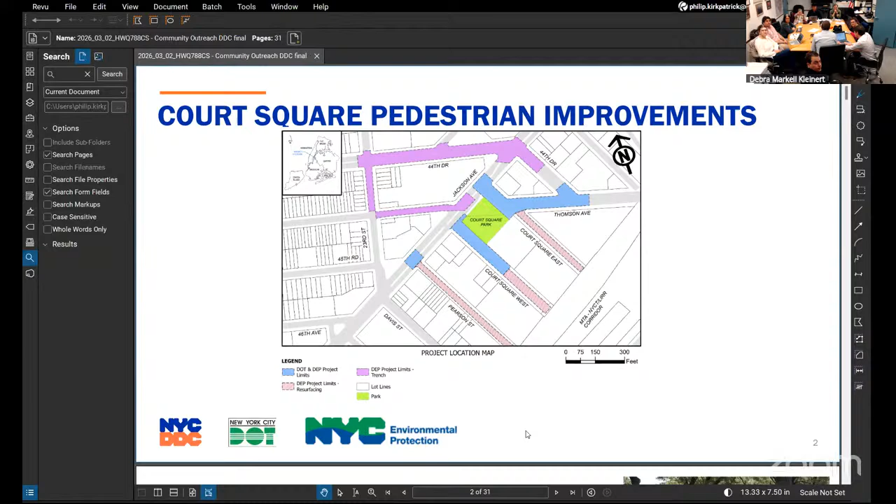So it's around the courthouse, a large part of it, and then what's opposite on the other side of the street, any structures? Familiar with MoMA? It's further down to the south, and then the pink areas around the city clock tower, formerly known as the Altice mobile buildings, and around that kind of property is where the water and sewer work is.

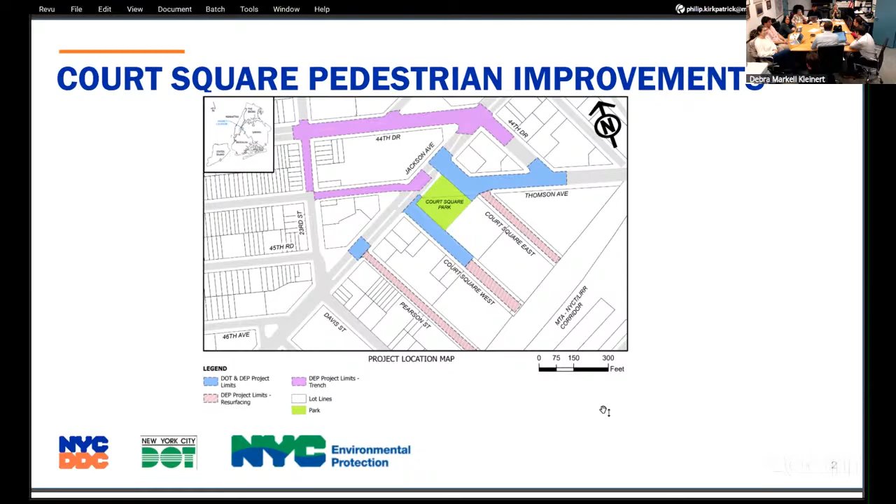Okay, we'll scroll. Here we go. Seems to work. That's good.

Just a little background on the origin of this project.

Following the original Long Island City rezoning in 2001, the neighborhood went through a big change with an increase of both jobs and residences. But the infrastructure has remained post-industrial, with very wide roads, not very hospitable for people walking and getting around the neighborhood. So we really want to make upgrades that meet both the existing demand of residential and community-oriented trips, as well as the upcoming density that is part of the One LIC rezone also passed. There's a lot of change happening in the neighborhood, and we want to make sure the infrastructure matches that change. DOT began exploring public realm improvements in the Court Square area to address these needs.

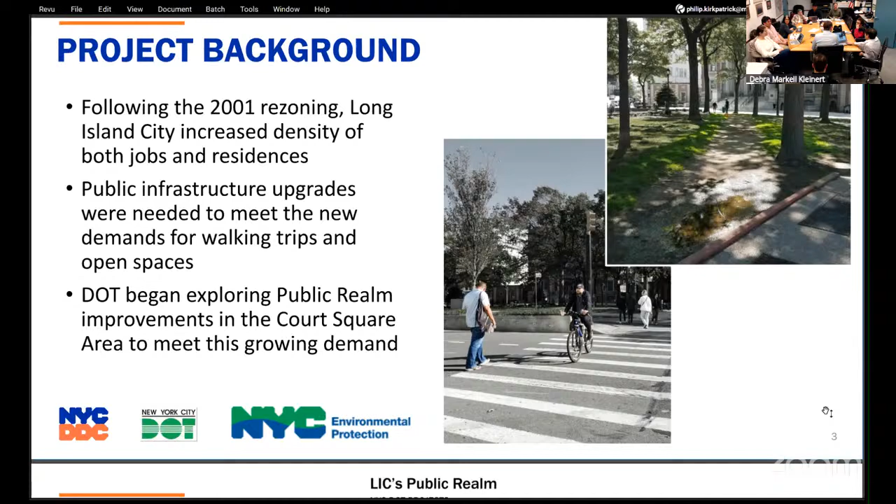For context, there's a lot happening in this neighborhood, both for DOT projects as well as the larger rezoning. There are past projects that improved the public realm on Jackson Avenue and Crescent Street, with shared street and pedestrian improvements. There's the recently installed 29th Street Plaza near the LaGuardia Community College, the 12th Street Plaza more towards the west in the neighborhood, and some upcoming planned projects on Thomson Avenue to increase bike connectivity.

There are also some additional capital projects upcoming. We are looking to build out the MoMA PS1 Plaza at 46th Avenue, which was recently funded as part of the Long Island City Downtown Revitalization Initiative, funded through the New York State Department of State. This project at Court Square, and a potential future project on Thomson Avenue near the project. So a lot is happening, and we want to make sure we're all coordinated.

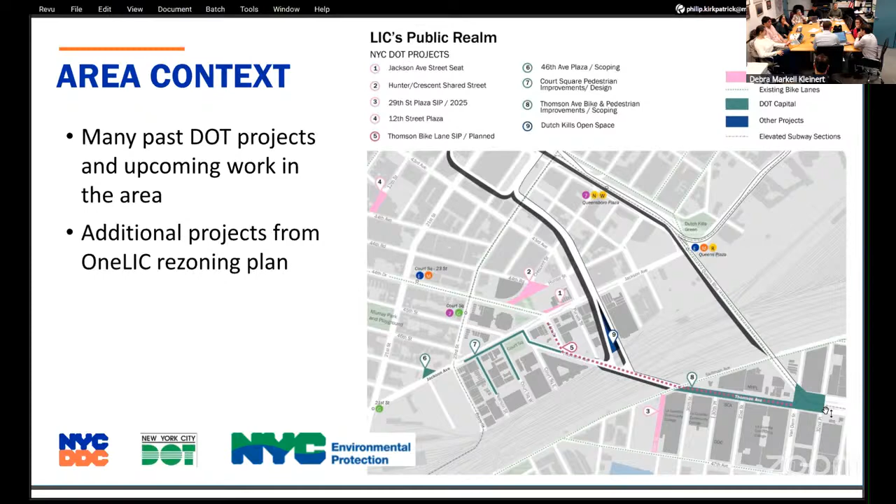For reference, for this project we began outreach in 2019, just before the pandemic, and had to do a bit of a shift as everyone did. We did merchant outreach and on-street outreach in October of 2019, followed by a virtual stakeholder meeting in November of 2020. We pivoted to a more virtual environment, culminating in final workshops in February of 2021. So we've done quite a bit of community outreach and engagement with both property owners, people on the street, and people in neighborhoods through virtual meetings.

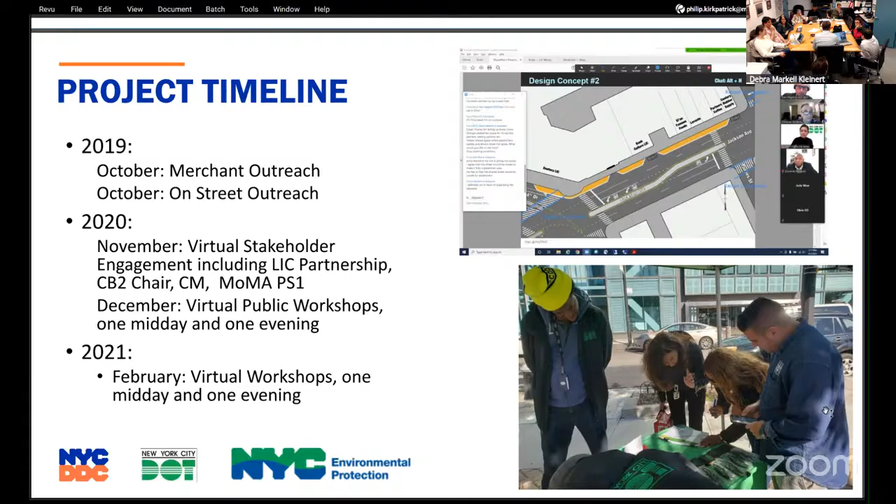Some general outcomes of that outreach: the most requested improvement for the Court Square area is increased pedestrian circulation space. There's a lot of roadway space, not a lot of sidewalk space. One activity we did for this outreach was have people trace their paths, and we saw where people are walking, shown on the map on the right. A lot of people come from the train over the bridge into the neighborhood, and people go up and down Court Square West to access the courthouse and businesses, while also accessing larger areas.

Some of the main concerns that we heard from the community were a high rate of vehicles failing to yield, high vehicular traffic volumes, and speeding vehicles.

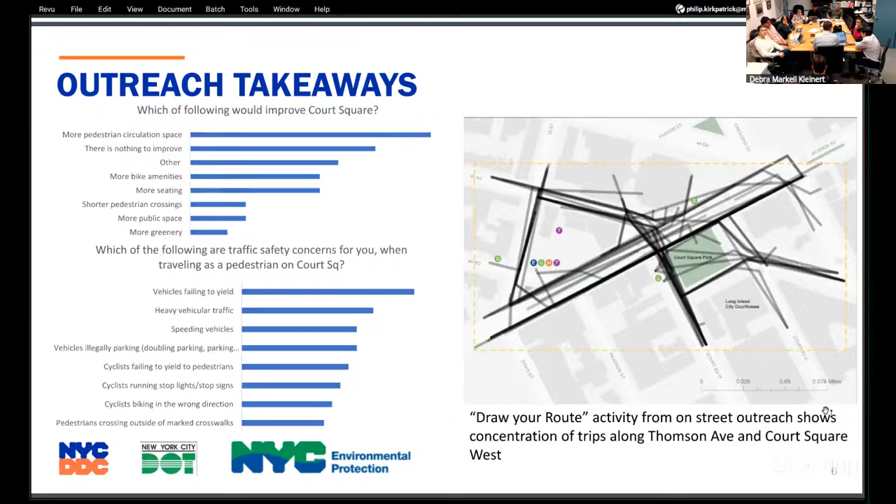The major moves for the street reconstruction project look to increase the amount of pedestrian space surrounding Court Square Park, creating a very pedestrian-focused node around the ongoing reconstruction of Court Square Park being undertaken by the New York City Department of Parks and Recreation. This creates a pedestrian-focused area for new and existing residents, around one of the premier open spaces.

We want to shift the heavy traffic volumes coming into the neighborhood for industrial uses and larger connections onto the larger arterials that have more connectivity with the road network. So we're looking to shift traffic onto 44th Drive, because that's a street that actually goes somewhere, ending at Jackson Avenue. And on Jackson Avenue, we want to improve and add new crossings to increase circulation to this new public open space.

For reference, as part of this project we are looking to convert Thomson Avenue to a one-way street, heading west or northbound depending on the direction, because it's a little angled and crooked. That would shift the southbound, more interior Queens-bound traffic onto 44th Drive. The volumes currently on this one block of Thomson Avenue can easily be accommodated on 44th Drive, which is where we'll be able to gain all of the space for additional pedestrian improvements by converting the street to one way.

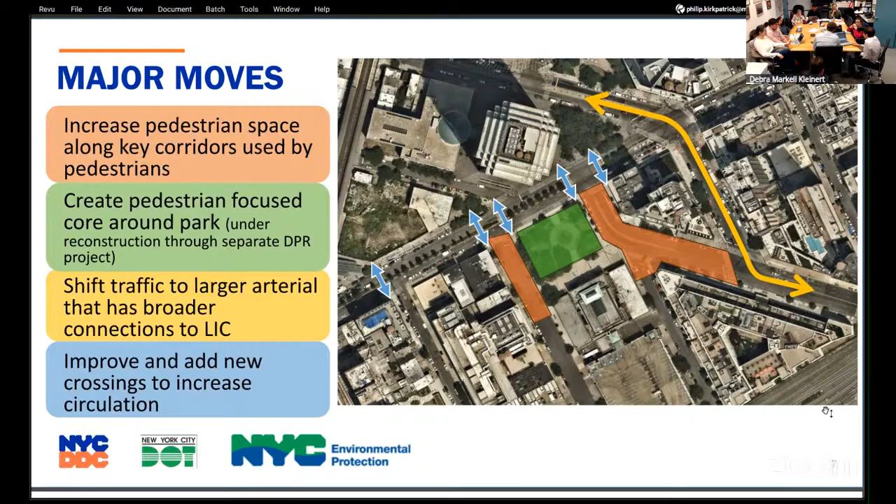I suppose, Morry, you have a question for now or later? I just wanted to clarify because I was a little confused on the previous slide. I wasn't able to follow whether these were color coded. For those of us with color vision impairment, I would please ask that in future you not rely on color alone, add a number or a letter for each one. It helps us. Thank you, appreciate it. Usually do, and I didn't. Thank you, Morry.

That actually ends the summary of the big transportation changes. I think the next slide is the overall presentation or project proposal, and I will pass it to the consultant team.

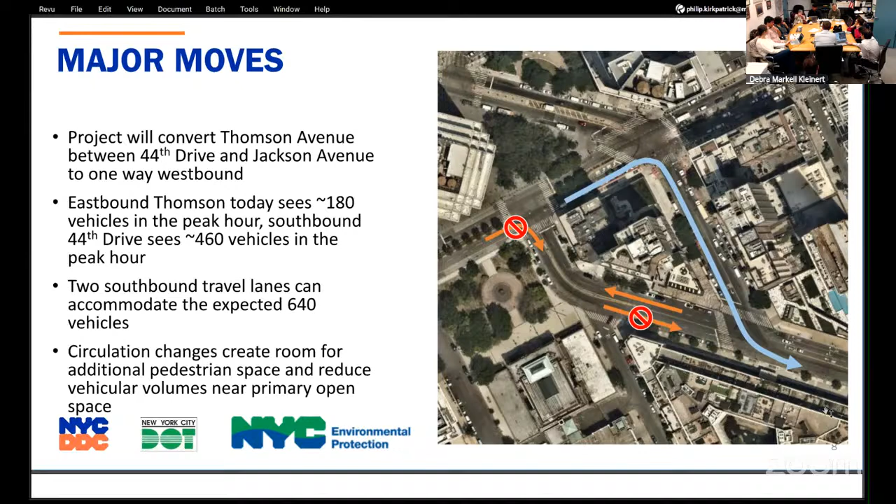Before you do that, you said Thomson Ave is going to be one way. So if somebody comes off the bridge and is coming down, they could do that, but they wouldn't be able to go the other way, correct. Anyone heading towards the bridge or towards LaGuardia Community College would use 44th Drive, which would remain two-way, because most people... That's 44th Drive where the arrow is. The red ones are one-way, the other ones show the two-way streets. That's Thomson - it would only be a one-way conversion for one block. But still, it prevents throughput then.

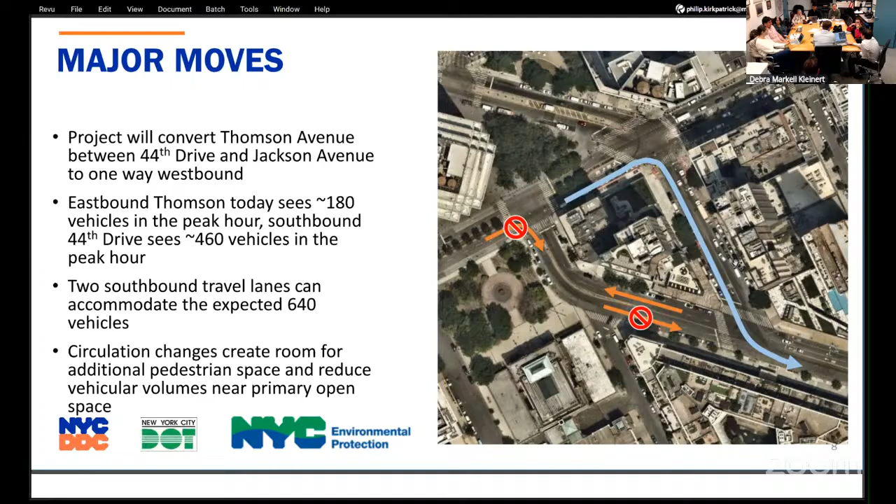There are two streets you can take from Queens Boulevard, or the upper level, when you're going towards Long Island City. If you're coming off the upper level, the ramps dead-end into Thomson - it's like an extension of Queens Boulevard. You get off the upper level, make a right, and then as you go down there are actually two different streets you can take towards Citibank or whatever it's called now. Yes, one is Thomson, one's 44th Drive.

So what you're saying is Thomson will be one way - I would not be able to take Thomson in that direction. What about 44th? That's going to be two ways, yes, that'll remain two-way. Okay, so then people reversing can only use 44th then. Correct, if you're heading out into central Queens, you would have to use 44th Drive.

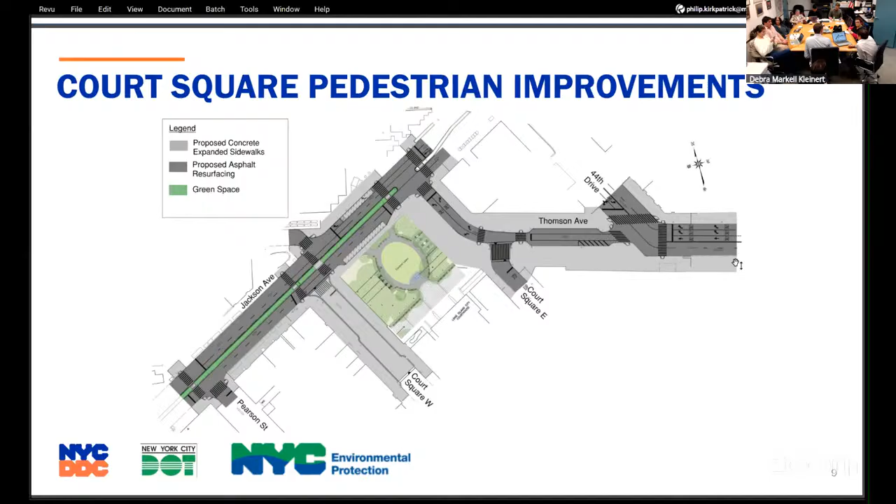This is the overall project map. In the lighter colors is the sidewalk areas, which will be concrete, and the darker colors are the asphalt. You can see we're expanding the pedestrian areas and sidewalks. There's Pearson Street, Court Square West.

The project objectives are to improve pedestrian safety for the core downtown Long Island City, for the Court Square subway station and the MTA bus routes along Jackson Avenue. We're going to create new public space, modernize the local street networks, and also have a DEP component upgrading the sewer and water main.

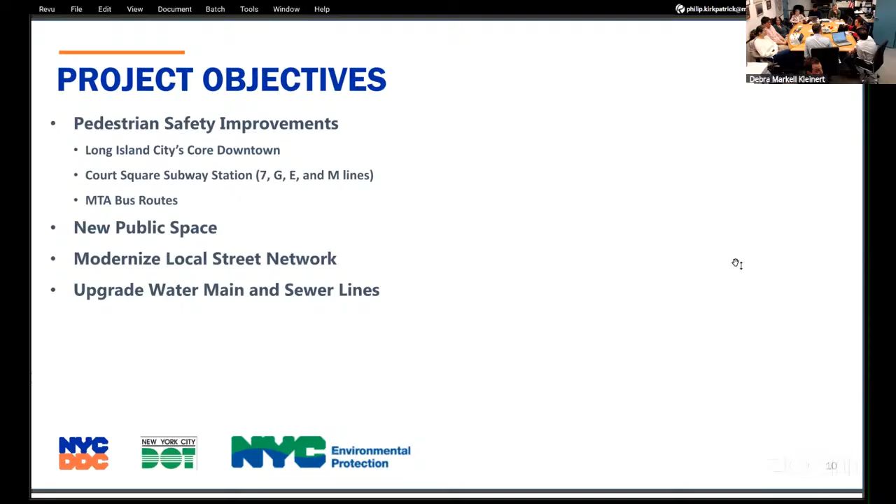We're coordinating with various agencies for this project. New York City DOT for the roadway design, street lighting, traffic signals, and the pedestrian areas. New York City DEP, we're improving sewer and water main design, and stormwater practices are being investigated with them.

New York City Parks, for all the street trees, and the Court Square Park current construction project going on at that park.

For New York City DDC, for this project, we are pursuing Envision certifications. MTA buses, we're rebuilding the bus stops along Jackson Avenue near the parks. For New York City Transit, we are constructing over the existing subway facilities, and coordinating with a couple transit subway projects in the area.

And for the mayor's office, this project was chosen for the Local Law 41 climate resiliency pilot program, which our landscape design will coordinate with. We'll share that later.

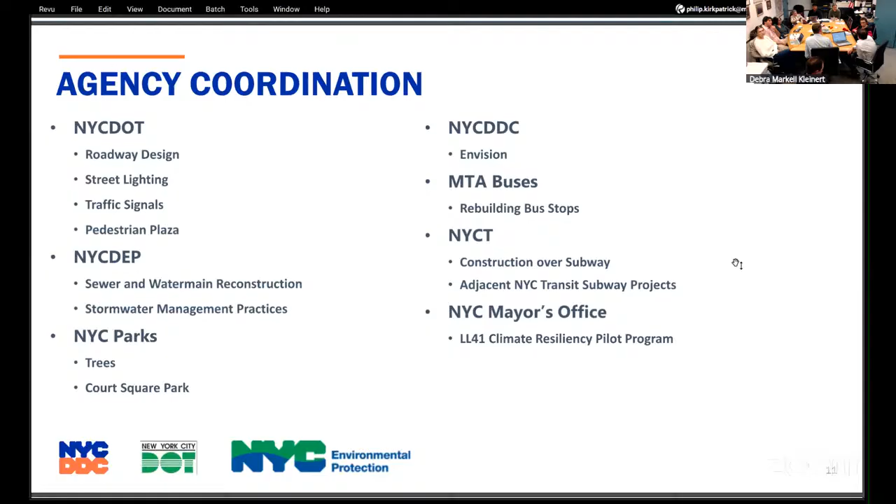One component of this project is a proposed shared street along Court Square West. From Jackson Avenue till approximately mid-block towards the dead end, we are going to raise the road and eliminate standard gutters, so there will be no curb lines, prioritizing pedestrian movements along the corridor.

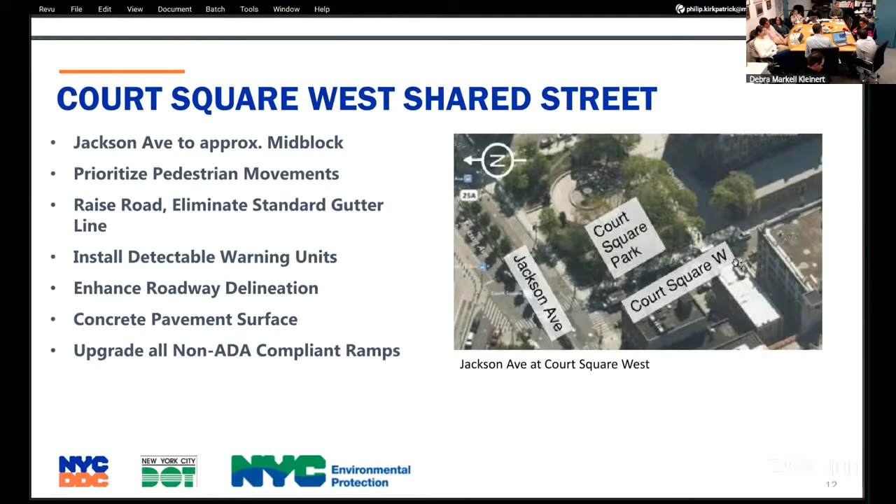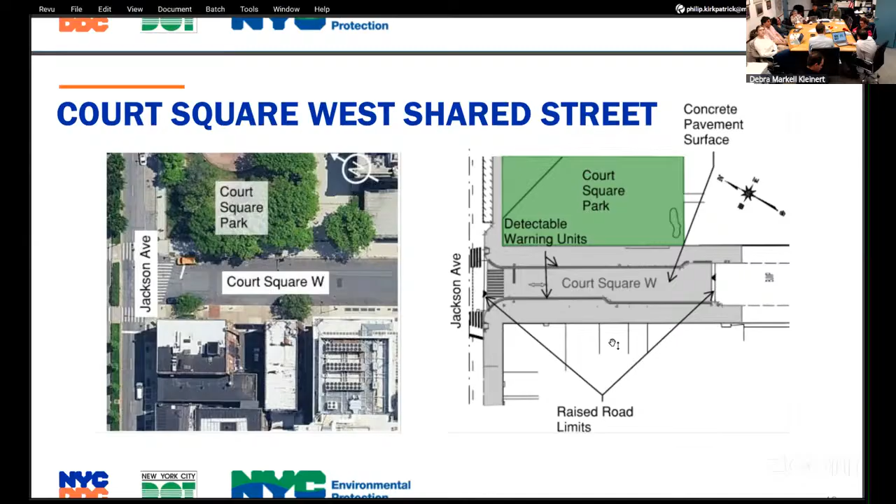Here's the concept. On the left is the current aerial with the asphalt street and the sidewalk separated, and on the right is the proposed concept. As mentioned, we're raising the roadway, pretty much adjacent to the park limits, and we're going to have detectable warning units—rectangles along the curb line—for pedestrians crossing anywhere, with concrete pavement where there's currently asphalt.

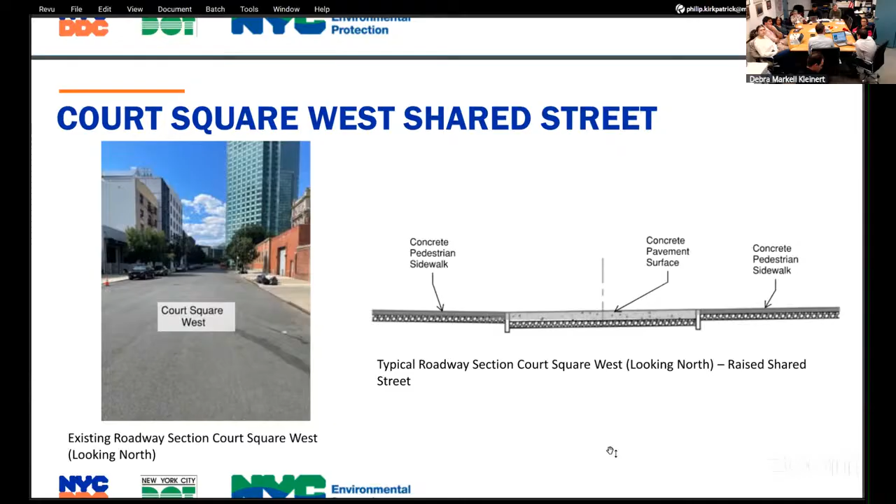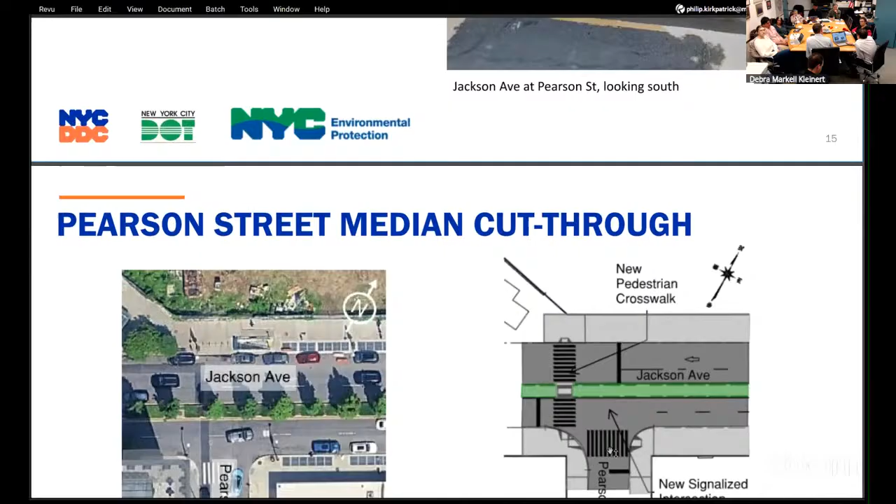Here it's side by side. To the left, you can see the current aerial view with the median across the street, so pedestrians don't have an access route towards the subway stop across the street for Pearson. On the right, on the west side of the intersection, we're going to put a cut-through so pedestrians can cross the street, and we're going to add a signal there, just the stop sign at Pearson Street.

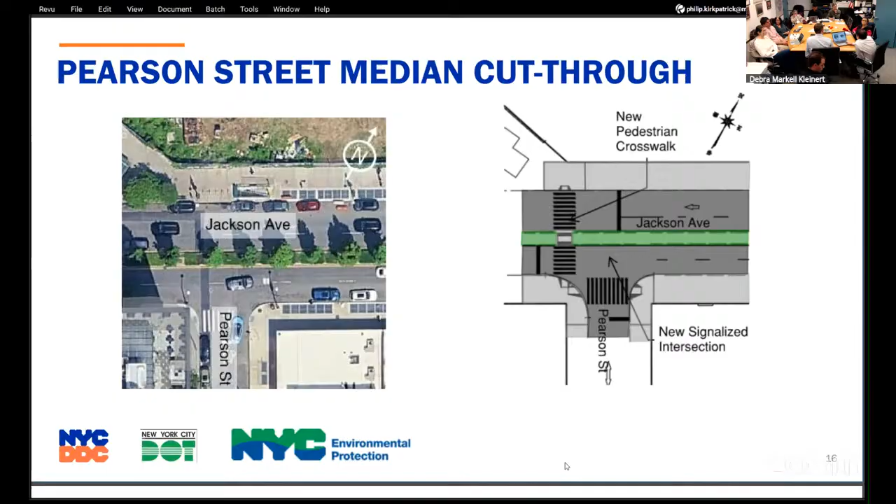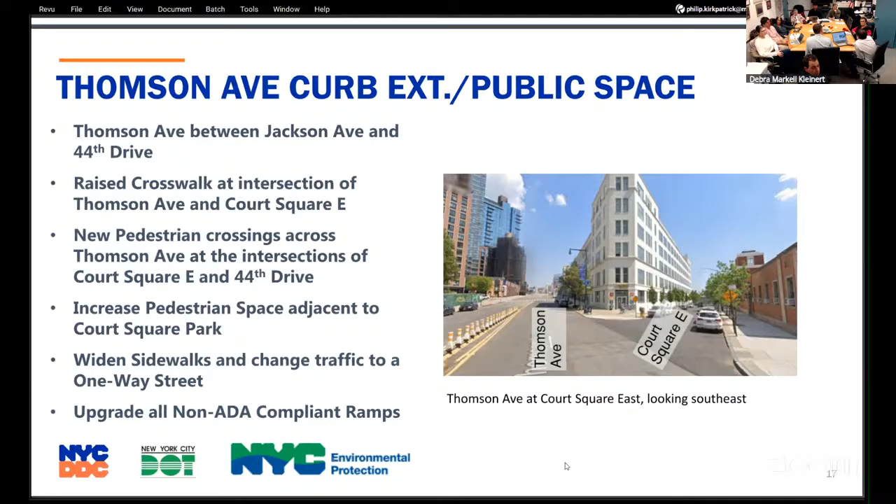On Thomson Avenue, as mentioned in previous slides, we're going to convert it to one way and extend the curb out. There's also going to be a raised crosswalk at the intersection of Thomson Avenue and Court Square East for pedestrian safety. Additionally, we're including new pedestrian crossings at Thomson Avenue, Court Square East, and at 44th Drive. The extended sidewalk will allow for pedestrian space, and again, as in all other areas, all the non-compliant pedestrian ramps will be addressed.

Here's an overview of the proposed area on Thomson Avenue. You can see on the south side, the sidewalk area has been expanded because of the conversion from two-way to one-way for more pedestrian safety and other extending aspects—the raised crosswalks at Court Square East, and new pedestrian crosswalks: two of them across Court Square East, and a new one at 44th Drive.

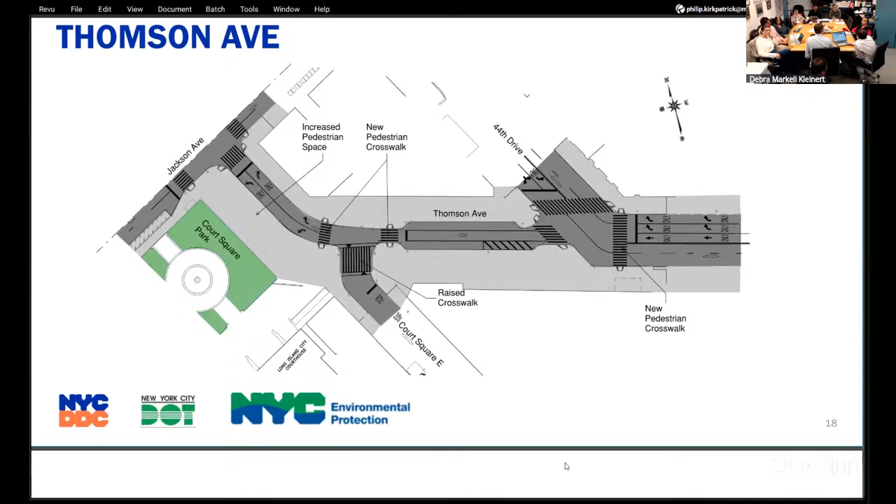As part of this project, we were investigating stormwater management practices, and we identified a few locations at Pearson Street and Thomson Avenue where we could propose concrete top infiltration basins and drain infrastructure.

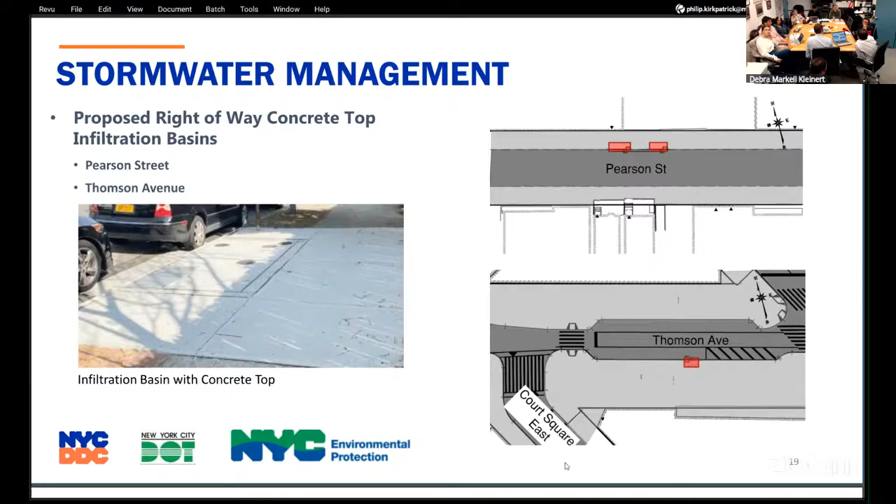As mentioned earlier in the slides, we have DEP work in the area where we're doing the DOT full depth reconstruction. We're going to upgrade the sewers and water mains, so the sewer work is just within the DOT work.

As mentioned before, we have areas like 44th Drive, Jackson Avenue, 23rd Street, and 45th Avenue where we're just going to replace the water mains and do standard trench restoration. For Pearson Street and part of Court Square West and Court Square East, we're going to upgrade the water mains, but we're going to do resurfacing after the trench restoration.

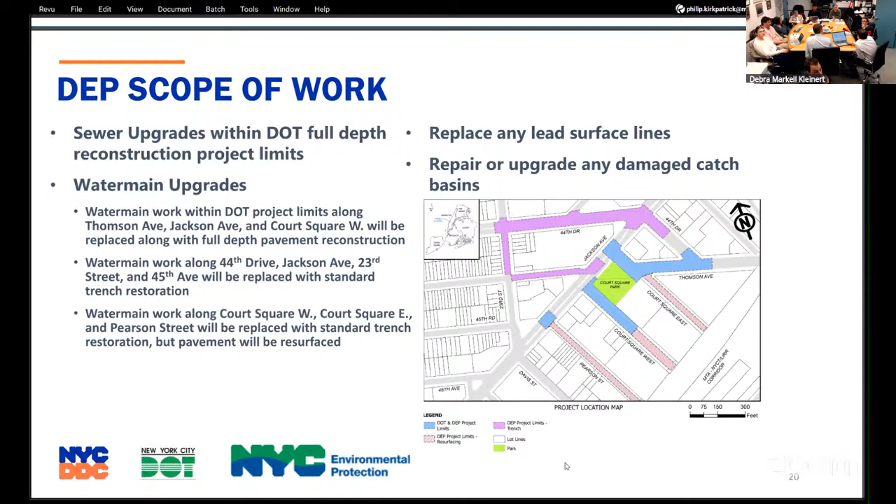This is a focus on the Court Square Park area, and the program called for two distinct spaces: one is a programmable community space, or community closet if you choose to call it that, on the east side of the park, and the other is a shared street, which Philip mentioned, on the west side of this park. In the community programmable space, that sidewalk is going to kick out now into that lane that's removed from Thomson Avenue.

So that sidewalk is going to be widened out to about 45 feet. That allows us to put one row of trees along the curb line, and we'll talk more about that later, but then a second row closer to the park so those two rows, or allée, would shade that area and make a nice spot for community gatherings and a proposed farmers market to be brought in later.

On the west side of the street, the shared street, Philip already mentioned most of that. There is no drop curb anymore on that street, so that allows pedestrians and vehicles to share the street. It also makes the space a little bit ambiguous so that pedestrians should have the right of way there.

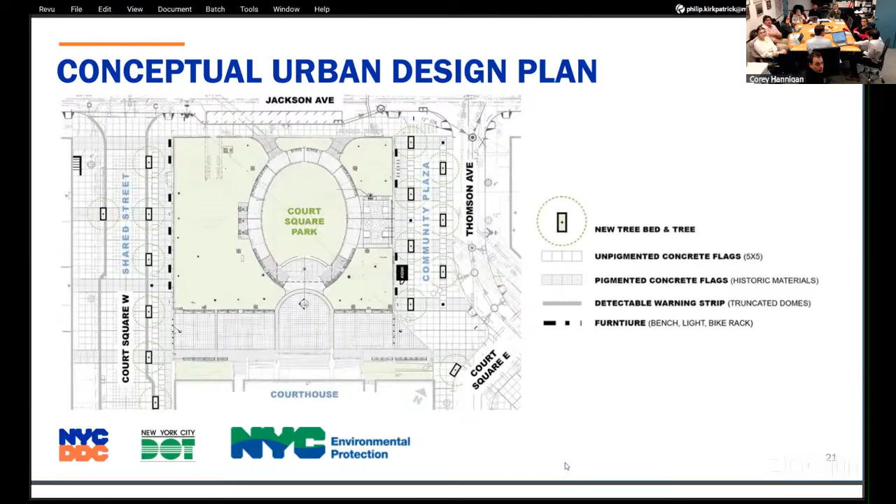Yes, sorry. Thanks, so very excited about both these proposals. I'm glad to see trees are being prioritized, and the wider sidewalk on Thomson being proposed as a community plaza - it's really great. I was actually going to ask if that was being considered, so you answered one question already.

So one question with Court Square West being a shared street - I know further east from there is a pretty large self-storage facility and a parking lot that, from a cursory glance at some aerials, seems like a lot of trucks. I'm wondering if that's going to be an impact in terms of how friendly the shared street really feels to pedestrians, what the current volumes are on that road now, and what you expect the impact of the horizontal deflection, vertical deflection, and all that stuff would have, because I don't think we want a situation where it's designed as a capital project for a shared street, but then it's full of trucks and no one likes it - the trucks nor the pedestrians, right?

And then the other follow-up question: is there a reason why that section of Thomson Avenue that we're currently proposing to be one-way couldn't get the same treatments and also be a sort of raised shared street type situation?

We take those because they're very DOT oriented. For the shared street, the volumes on Court Square West are very low, even though there are fairly vehicular-oriented land uses on those streets. It's not a very high volume generator - storage lockers don't generate a lot of vehicle trips. They do have vehicle access, but there's not very many trips during the day, and it's the same with the parking lot - it's really just repetitive people coming and going from the same parking lot.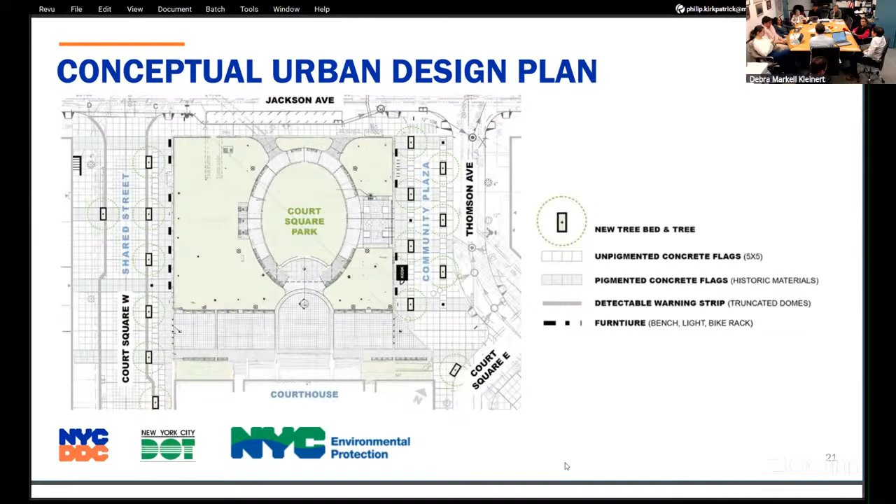All right, and then this is a detail continuing on down Thomson towards the bridge over the Sunnyside Yards. Here again, the sidewalk is expanding out into the lane of traffic that is no longer there, so we're adding a new line of trees along the curb line, in addition to the existing line that is there. Similar to the community space on the east side of the park, this should create a shady area, so anyone on a hot day coming over that bridge - there's not a lot of tree cover down there - should find some refuge here as they approach the park, hopefully with a whole cooling effect.

I think the rest, you see the raised crosswalk there between Thomson where it connects up on the upper left into the park space, community space. And again, a continuation of the alternate color banding to create some visual interest in concrete instead of the other pavers that were there before.

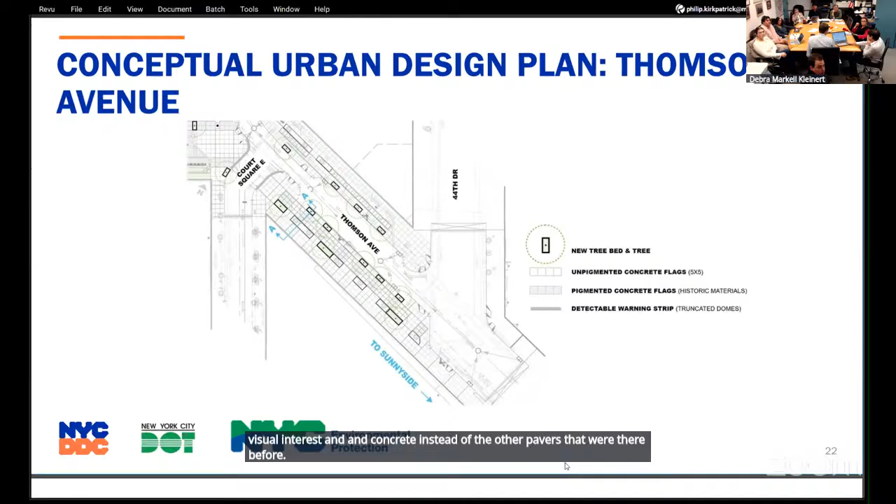So this is a section of Thomson, the kick out into the street, but it is also very similar to the community space on the east side of the park.

As Philip mentioned, this has been a pilot project under Local Law 41, which mandates us to explore design alternatives that will address future heat island effect in this area, since it has been identified as a potential future heat island.

Our design alternative is to grow large trees, because large trees not only provide a lot of shade, but they also wick up water and evaporate it through their leaves in a process called evapotranspiration. That evaporation actually absorbs heat, so the trees create cool air as well as providing shade.

In order to get large trees, especially in a converted roadbed where the material is highly compacted and has little organic matter, a tree will not grow there. A standard tree pit also does not provide enough soil volume to grow a large tree.

So the design initiative here is to include what's generically called soil cells, a modular pedestal system under the pedestrian space that will hold good uncompacted soil, which trees need to grow large and provide shade and evapotranspiration cooling.

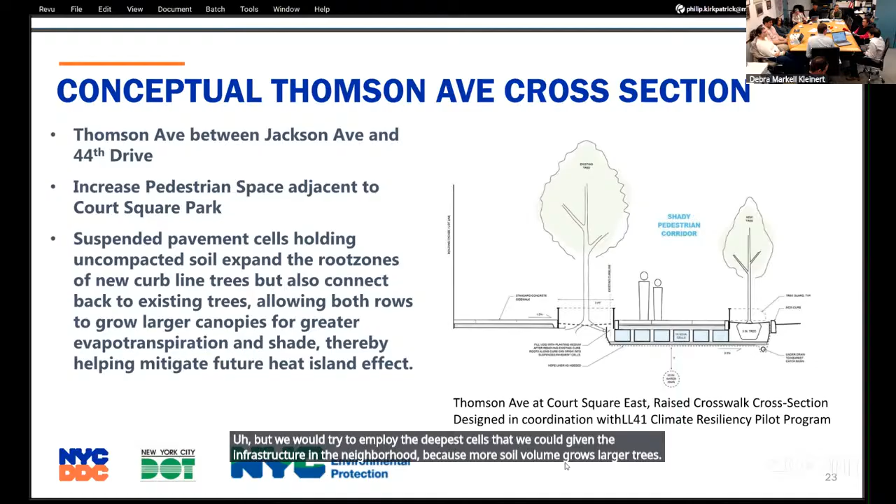As mentioned before, as part of this project we are pursuing Envision certification. Envision is kind of like LEED for infrastructure projects. It's a framework that includes credits, with 64 different categories and subcategories where you can pursue credits to try to get certification. You can see a few categories here: quality of life, leadership, resource allocation, natural world, climate, and resiliency.

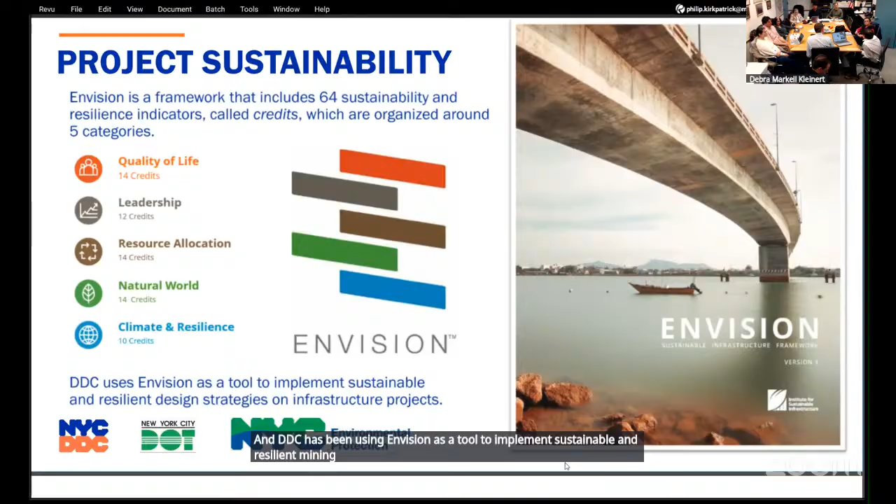DDC has been using Envision as a tool to implement sustainable and resilient design strategies on their various infrastructure projects. For this project, there are multiple goals you can pursue, and here are four example goals we would be pursuing to help meet these Envision standards.

Enhance public space and amenities: you can see the various ways we're looking to enhance the public space with the plaza and expanded sidewalks. Provide stakeholder involvement: we go meet stakeholders with various projects to discuss and get some feedback from them.

Support sustainable procurement practices: as part of the bidding documents, they offer incentives to encourage sustainable construction practices and stormwater management, such as the green infrastructure practices we're pursuing. There are other goals and credits that are part of this, but these are what we're pursuing to help meet the Envision requirements for this project.

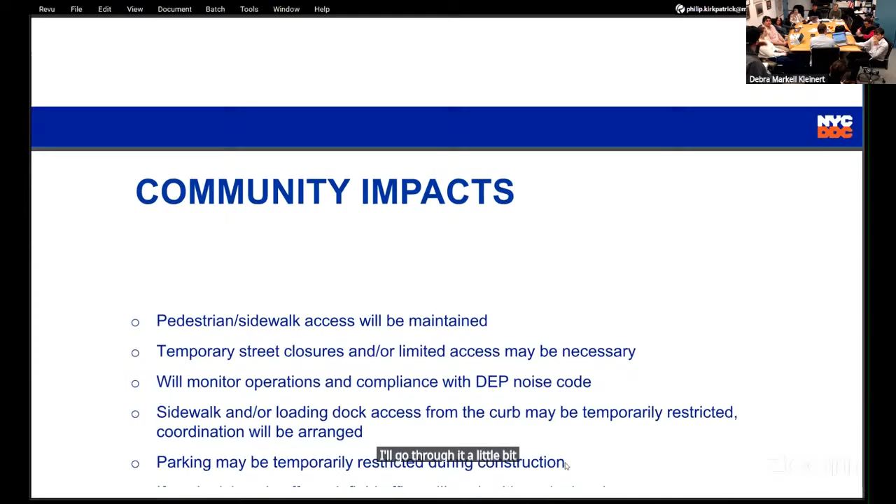Even though construction is not going to start until the summer of 2027, I just want to give the committee a little idea about what to expect during the construction phase. I'll go through it briefly. When construction is imminent, we will be happy to come back and allow you to meet with the contractor who's actually going to perform the work and go into more detail. This is just to give you a preview as we look forward to the construction phase.

These are just the general guidelines. We maintain pedestrian sidewalk access at all times. If there's a need to work on a portion of the sidewalk, we would set up an alternate access for pedestrians. Street closures are avoided unless there's a particular operation that requires a very temporary street closure; otherwise the street will remain open to traffic flow. If necessary, we will have flaggers in place to direct traffic.

We will comply with DEP noise codes. There may be restrictions on parking during construction, of course. We coordinate with the sanitation department if there's any impact on trash pickup, and rodent abatement is required.

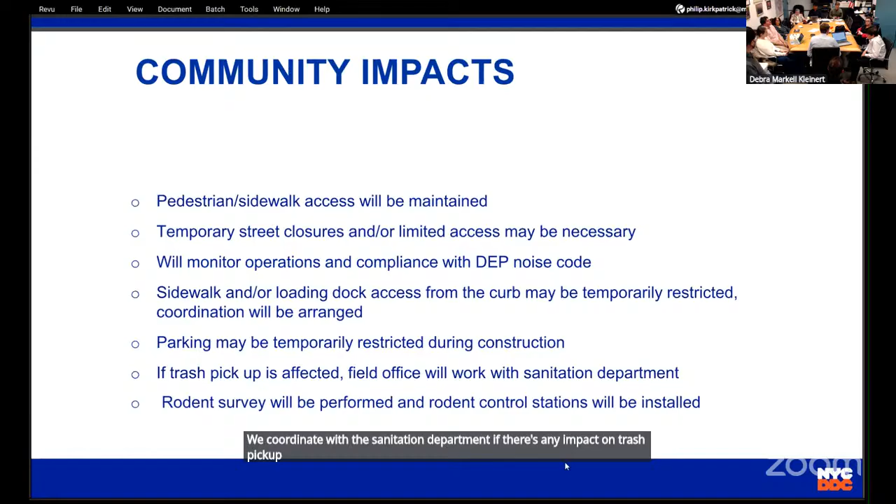Pedestrian access is maintained. Do you include bicycle routes? Yeah, we would work with DOT on that, but generally they set up some type of diversion - that's what we call an MPT. Whenever there's any kind of construction that impacts a bike facility, there has to be an alternative, especially if it's protected. So those plans are submitted and they have to get approved by DOT, whatever DOT mandates, that's what we have to do.

As mentioned, there is going to be some underground improvement to the DEP infrastructure, water and sewer infrastructure. So with that comes some situations in which we have to have a water shut off during the time when the water lines are being replaced. Our protocol is to give at least 72-hour notification, followed by 24-hour confirmation or cancellation for the water shutdown.

It mentions here our community construction liaison - just to let you know, on a project like this, we have a full-time person whose job is to communicate with this board, with any community groups or organizations, residents, businesses, anyone who is in the project area who is affected will be receiving communications from that liaison, both in person and by email.

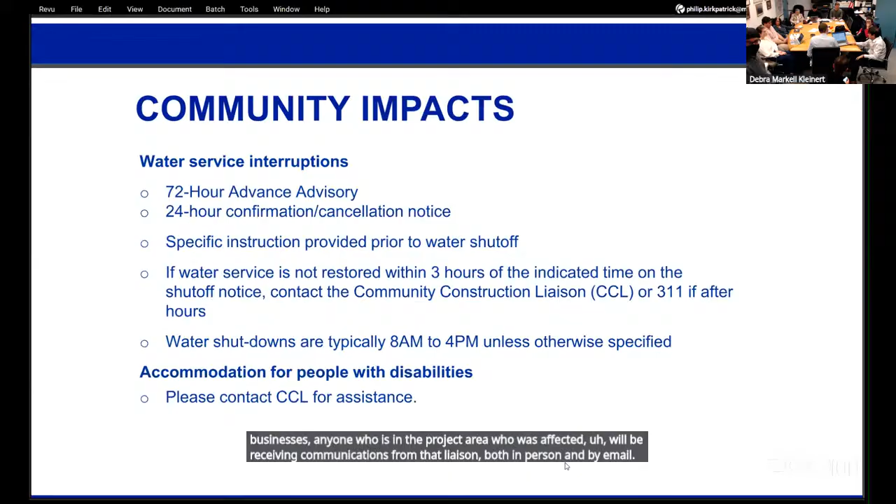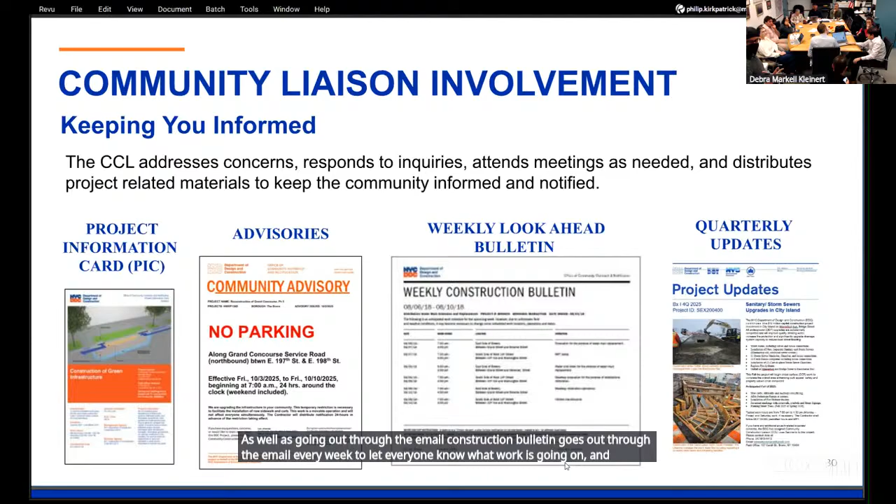Thank you very much. Did you say how long construction is expected to take? To start, but I don't know - did we have that? Let me double check before I answer that question. Okay, thank you.

Anyone may answer, but what currently goes on at the courthouse? What city agencies are there? I did jury duty in Jamaica. I don't know, it's still off. Is anybody inside? Well, I thought it was supposed to - still a courthouse, yeah, Supreme Court? Yeah, they still have cases going on? Yeah, really, I think when you get called for jury duty that's one of the options. But I heard they don't have air conditioning. Sounds like another active process.

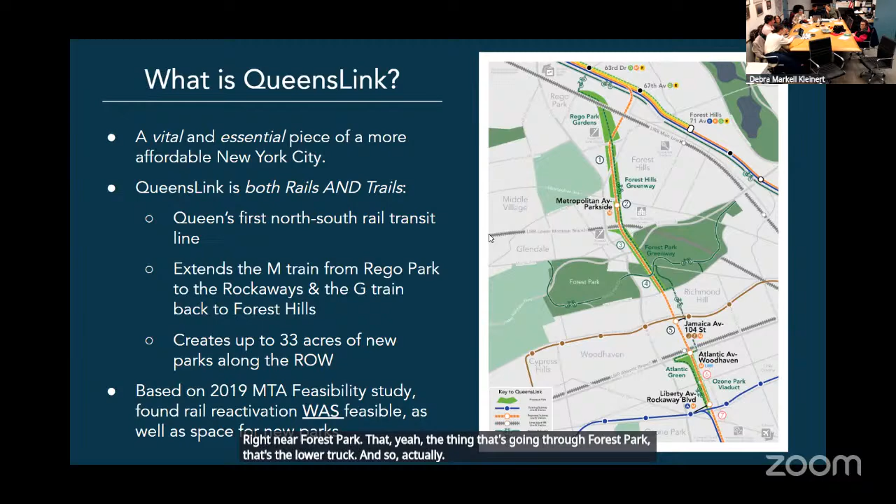By the way, in regards to your question about the lower Montauk branch, it's on the map here. If you look in the very middle, sort of like the railroad tracks stretching across the screen, near Forest Park - the thing going through Forest Park, that's the lower Montauk. So actually, there is a way this would intersect with QueensLink, and you'd get a station there to connect to the lower Montauk. So if that ever one day became activated again for passenger rail, you'd have a connection to QueensLink.

So what can we do for you? Hold on, Corey has his hand up. Yeah, so I just want to make sure we're at the end of the presentation, and I'm not missing anything, before I ask my question. We're done with the presentation, we're basically done.

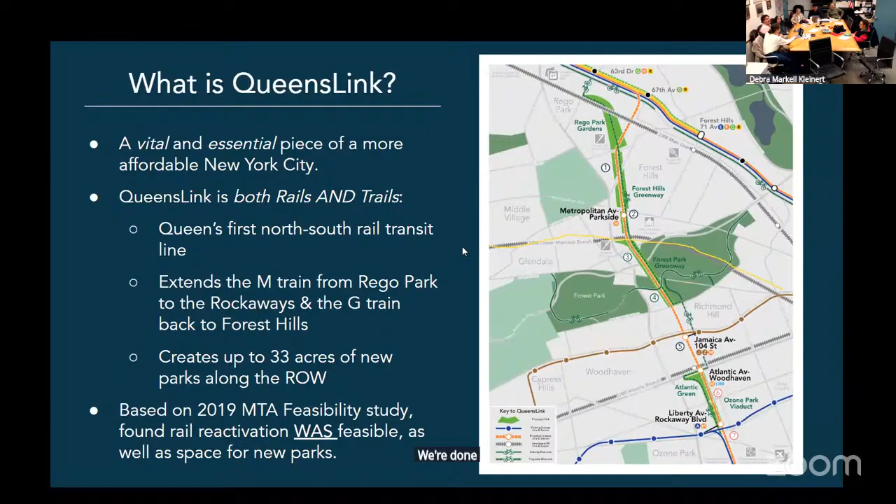Okay good, so I am strongly in support of this proposal. I used to live in South Slope, Brooklyn, and loved taking the F train to Coney Island - it was a short 40-minute trip, one-seat ride. Now I live in Sunnyside, and no matter what beach I pick, it's a 90-minute trip. I look forlornly at the underutilized corridor here and wish I could get down to Rockaway Beach, which is Queens's beach, that's our beach. I feel like this borough is just split into two - there's the southern half, that whole A train corridor, and then there's the northern western part, which is like the 7 train and the N and all the rest that we live in. It's just not fair that they're not linked up into a cohesive borough. I think the economic argument is really strong.

There's so many people that would benefit from all of the job growth in Long Island City if they could only get to it efficiently. And I think it's a no-brainer to activate this corridor.

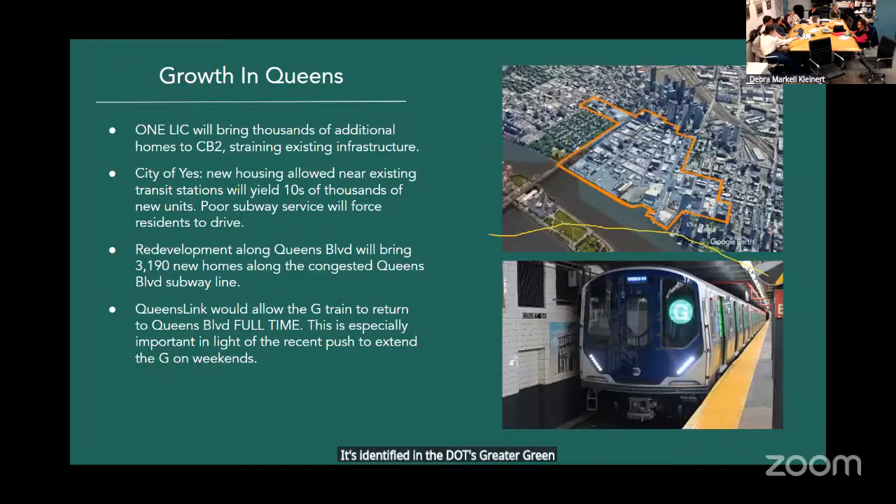Obviously, the elephant in the room is the Queensway project. It has funding behind it, and it's identified in the DOT's Greater Greenways Plan. Full disclosure, I used to work for Tri-State Transportation Campaign, which is a co-sponsor, so we support this project, but we're also on the New York City Greenways Coalition, and the Greenways Coalition supports Queensway.

We all want projects that are feasible, that have momentum to get built. We don't want to kill a good project because we might get funding for a better one later. So I think that's my concern, is how do we bridge that divide? Is there a way to get you guys to be talking with the Greenways Coalition?

Not necessarily the Queensway group, but just in terms of finding a way to do these trail projects in a way that doesn't obviate the ability to do the rail corridor later. I know you guys are talking about rail and trail, so that's something I'd like to discuss more.

I was actually talking about this project with Bobby Preddy, who is another advocate in the neighborhood with Families for Safe Streets, who also struggles to take his family to the beach and just doesn't do the bus anymore because it's such a nightmare. He actually takes the Long Island Railroad out to Long Beach, and pays all that money just to take his family to the beach because it's easier.

And maybe there's something to the fact that the Queensway, the trail, is very tangible. Everyone loves a park, and it's hard to sell to someone how they're going to benefit.

I wonder if it'd be possible to make some kind of tool. I know when the Queens bus redesign happened, the MTA put out a tool where you could plug in, like, I want to go here, how long does it take me to get there now, and how long will it take me to get there under the new plan. I think if people had an easy way to see how much time they personally would save with QueensLink, it would just be so clear and such a no-brainer to everyone in Queens how good this would be.

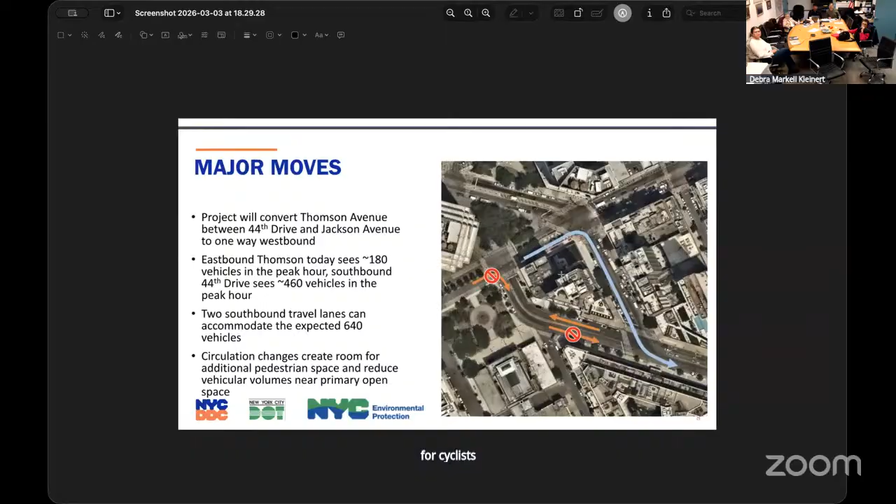So the Thomson Avenue part east of 44th Drive would be one way westbound. Oh, that makes total sense. You took a screenshot of it. Cyclists coming east from the park aren't going to go up Jackson and turn right on Thomson, they're just going to cut straight across.

Just to clarify, from 44th Drive to Jackson that is one way. On the screen, the blue continues as it is, but the red is getting rid of the eastward traffic and just turning it west. You can't turn right on this part of Thomson anymore, is the proposal. You have to go to this light on 44th, take a right, and then take a left.

A lot of cars already do that because unless you're coming into the lot right now, you go that way. It's a bit weird. I usually don't do the blue line if I'm driving, I go up the other way, but I won't be able to do that in the future. They're essentially filling in the eastbound lane and making it a sidewalk. This travel lane is going away.

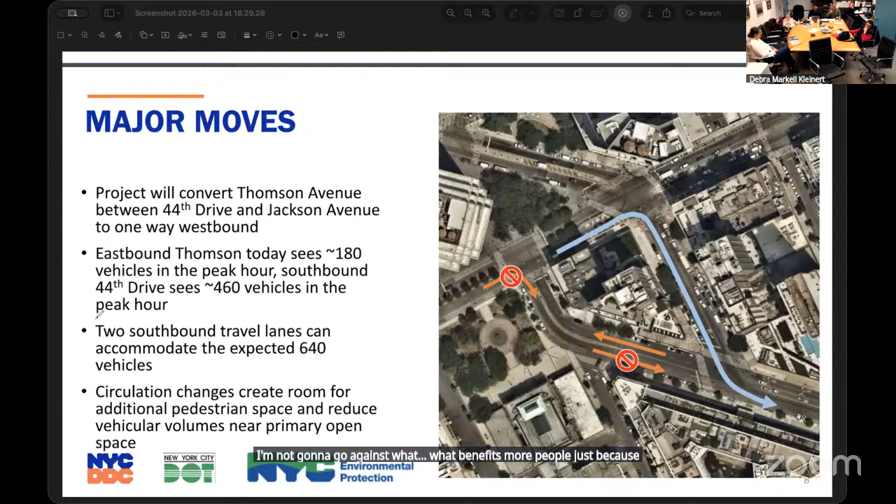And in spite of the long blue arrow going one direction, that's actually a two-way street, they're just showing the current traffic flow. So then I wouldn't be able to make a right turn there, I would just go straight and do the other, which is fine. If I'm driving I can do it, I don't really care. I'm not going to go against what benefits more people just because I like to do it that way sometimes when I drive. That makes sense though, I think it's better for the community.

So the motion, I'll restate: in support of the Court Square pedestrianization project, but the committee requests that the scope of the project include public restrooms, secure bike parking, and an eastbound protected bike lane on Thomson Avenue connecting to a contraflow protected bike lane on the one-way conversion of Thomson Avenue.